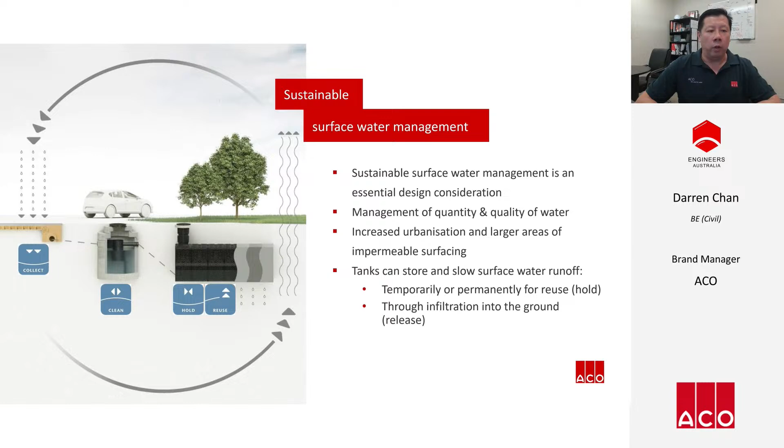Underground tanks are used in lots of projects as councils legislate to protect their downstream waterways and infrastructure. Managing both the quantity and quality of water being discharged off a site is only going to grow in importance, particularly as our cities urbanise and rainfall events intensify as the climate changes. These days, larger areas of the built environment are being covered by impermeable surfaces, which of course increases the risk of flooding. Tank solutions are a conventional way to store and slow down the surface water runoff to pre-development rates as well as replenish the groundwater at a more natural rate.

These are the system elements that are designed to work with the natural water cycle. On a slab or pavement, drains are typically positioned to intercept or collect stormwater runoff, which is then treated or cleaned to prevent clogging or contamination downstream.

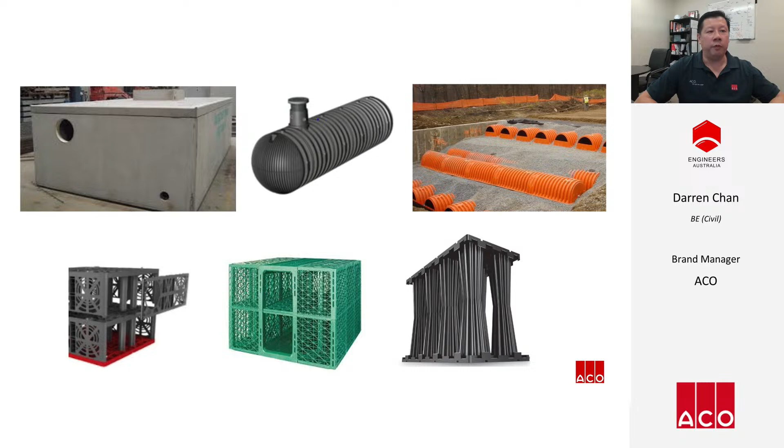As you can see on the image, there are a number of tank solutions available to engineers and urban designers, both natural or engineered structures. Some of the engineered tank solutions include cast-in-place, precast concrete tanks, arches, and plastic structures. We'll focus today on just plastic stormwater tanks, which can be easily integrated in a stormwater management plan for the infiltration, retention, or detention of surface water runoff.

Detention systems, also known as attenuation systems, are designed to spread the peak flow of a storm event. It does this by holding and releasing stormwater slowly. The idea of this is by controlling the runoff to reduce the risk of flooding downstream from a development. A retention system collects and stores water permanently for reuse, for example, to water landscape areas or for firefighting purposes. Infiltration systems or soak wells are used a lot in sandy areas to temporarily store water to allow it to naturally seep back into the ground to replenish a dropping water table.

To illustrate this, retention and infiltration are two common adaptations of these tanks to make the best use of captured stormwater. Retention is for irrigation or reuse purposes. Infiltration is where the soil can naturally free the water from impurities. In both cases, the water is used at or close to the source of collection without it flowing through to any downstream infrastructure or receiving waterways.

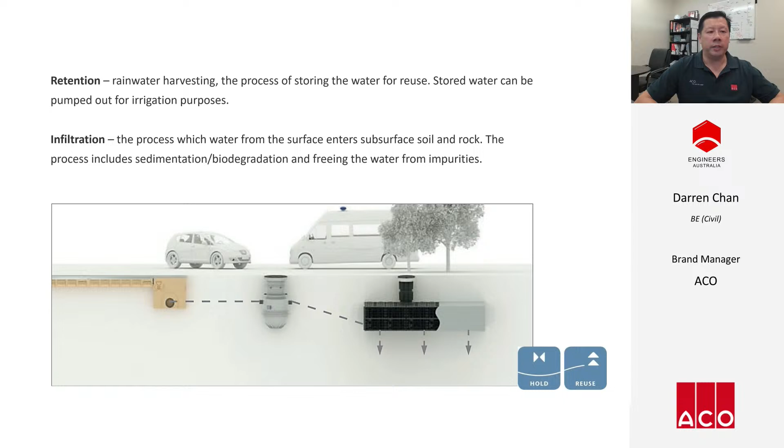But if discharging into downstream infrastructure is the objective, then as I explained before, detention gives designers the greatest control over the quantity of water to enter it. In very simple terms, it's an easy calculation.

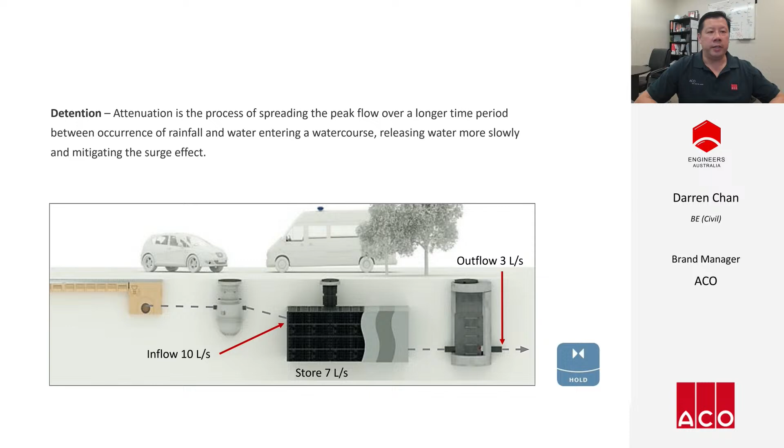Before I go on, I want to make special mention on two types of hydraulic control structures. The first are stormwater treatment devices. These are located upstream of the tank, with their performance being individually assessed and governed by the EPA and local DA requirements. Depending on the project requirements, there are many types, from gross pollutants or silt traps, stormwater filters, permeable pipes, to even light oil separators used where hydrocarbons exist.

The other type of hydraulic structure are flow control devices, which control the release of water to prescribed rates downstream of the tank. These are typically installed in chambers with either purpose-designed mechanisms or a conventional orifice plate. Both these hydraulic control structures are not the topic of today's presentation, but I wanted to mention them as they are essential elements that affect the quality and quantity of water being discharged off the site.

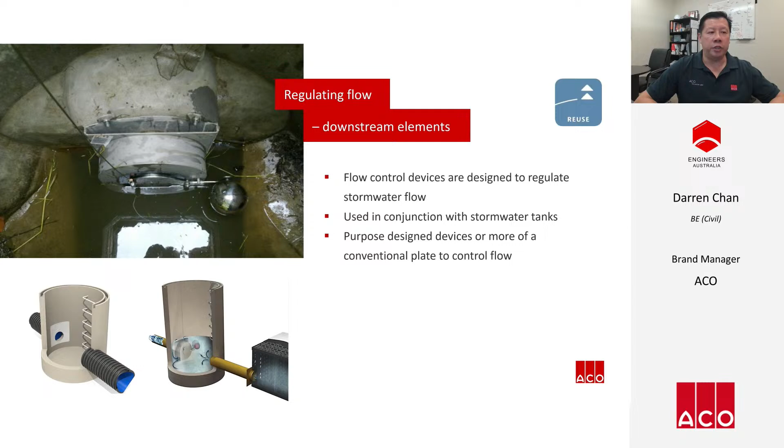So today, I'm only going to focus on plastic tanks that can be assembled into producing underground cells for water storage. These can be adapted in a softscape where infiltration can be achieved. Here you can see them assembled, wrapped, and backfilled.

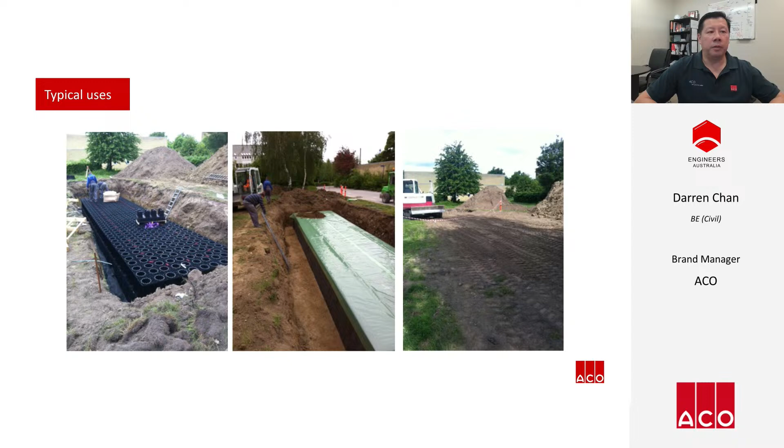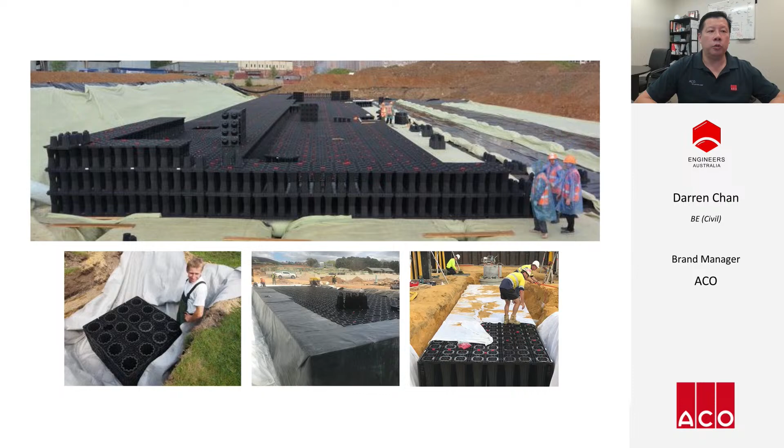They can be installed under slabs in commercial and industrial applications where space is a premium. In fact, geocellular plastic tanks are installed in lots of projects, from car parks, driveways, and landscaped areas to commercial buildings, schools, industrial areas, airports, and military bases.

Here is an example of a recent installation of a tank being used for infiltration at a life-saving club. Stormwater captured from the club's rooftop and its infiltration into nearby vegetation was part of the sustainability design brief. With limited space to work with, designers needed to maximize the storage capacity of an infiltration tank whilst fitting into a very restricted space. An easy-to-maintain sedimentation trap was also required.

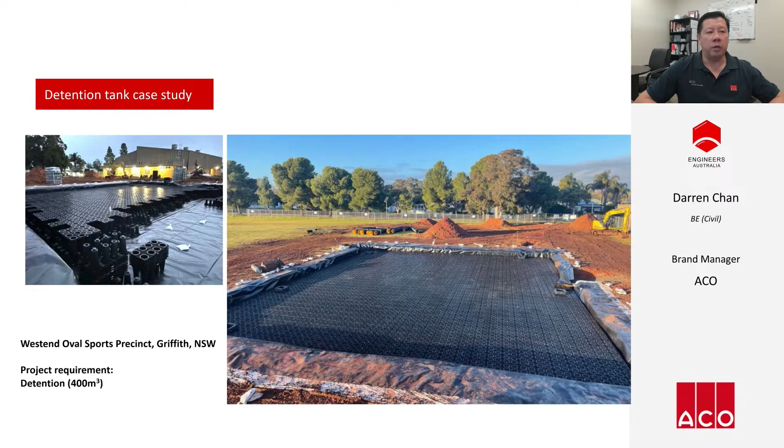This is an example of a tank being used for detention in Griffith, New South Wales. Designers had to deal with runoff from the site. The tank would store and gradually release the stormwater runoff into the council's downstream infrastructure, while also allowing direct access for watering the sports field.

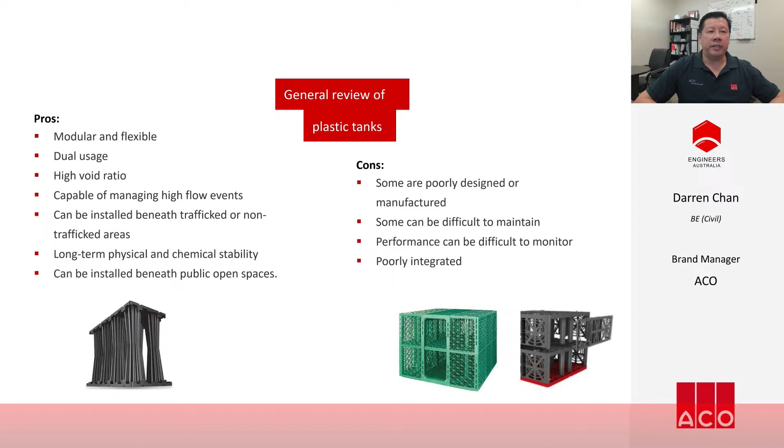In the industry, there is a wide range of plastic tanks. The two on the right are typical of plastic crates. The one on the left is typical of a modern geocellular unit. Unlike concrete tanks, plastic tanks are versatile. They can be cut and joined, and the structure can be used for infiltration. Good designs have a high void ratio and are easily maintained.

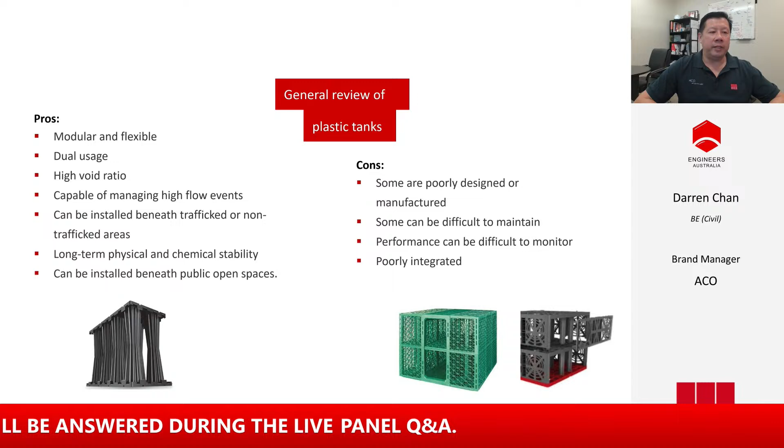Good designs are also load rated and hold their strength over time, but there are poorly designed plastic tanks that are difficult to access, inspect, and maintain. Unfortunately, these give all plastic tanks a bad name. Finally, the designer must ensure these products are integrated and meet the quality and durability requirements of the stormwater management plan.

So when specifying plastic tanks, there's a number of things to consider. Councils, through their development control plans, will enforce compliance to regulations. They will specify the methods and engineering needs to ensure the property meets the stormwater management plan. This takes into account the volume of water that the property needs to manage from landscaped, hardstand, and roofed areas.

Not only does the certifying engineer need to integrate the tanks properly, but as with all key stormwater products, the structures themselves need to meet minimum strength, durability, and quality requirements.

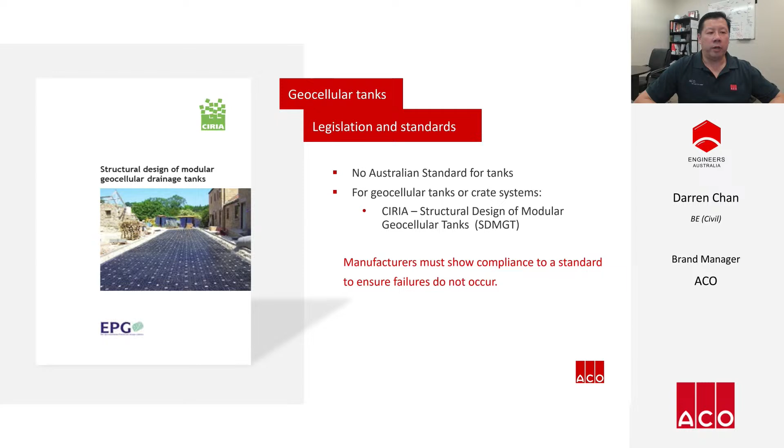In Australia, there are no standards that govern plastic tanks, and the problem with that is that some manufacturers make claims about strength and design life that just aren't substantiated. However, there is a UK standard for plastic tanks called Structural Design of Modular Geocellular Tanks. It gives guidance on testing, structural design, construction, and installation. This is the gold standard to benchmark for performance, and manufacturers should qualify their products to this standard to ensure that failures don't occur.

A structural design should consider the load-bearing capacity of the tank. The stronger the tank, the shallower it can be buried, resulting in reduced construction cost. What determines the depth of cover required are things like the soil type, tank design capacity, groundwater level, pavement thickness, and design loads. The UK standard identifies these as the main factors overlooked that contribute to failures.

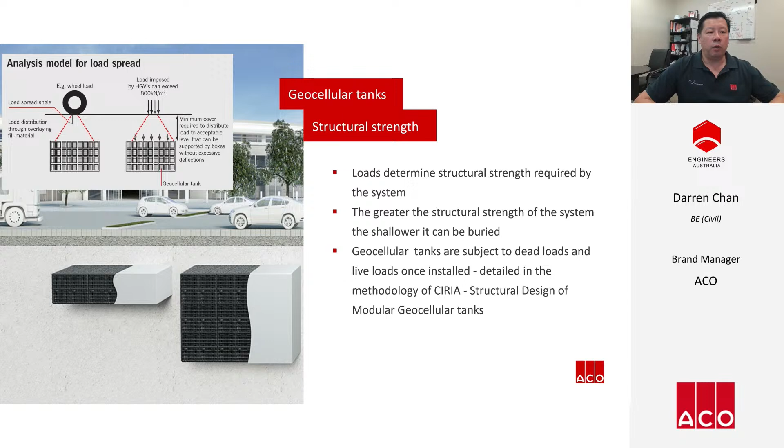And manufacturers must be able to come clean on their strength data and prove it with independent testing. To address all this, the UK standard has detailed all the requirements for laboratory strength testing.

And when considering loads, both short-term and long-term loads must be addressed. Dead loads include the mass of soil surrounding the structure, plus the weight of slabs, or anything else permanent that a tank will be subjected to. Live loads are temporary loads like vehicles, which also need to be considered. Tanks that have vertically aligned load-bearing pillars will offer good vertical strength and stability, and manufacturers should be able to provide you with independently tested vertical load results.

Lateral loading is as important as vertical loading and takes into consideration soil mechanics. This is the key driver to how deep a tank can be installed. Beware that specifically in high water table applications, tanks can be pushed out of the ground. So in these instances, either locate the tank close to the surface to avoid the water table, or beneath heavy pavement to anchor it down.

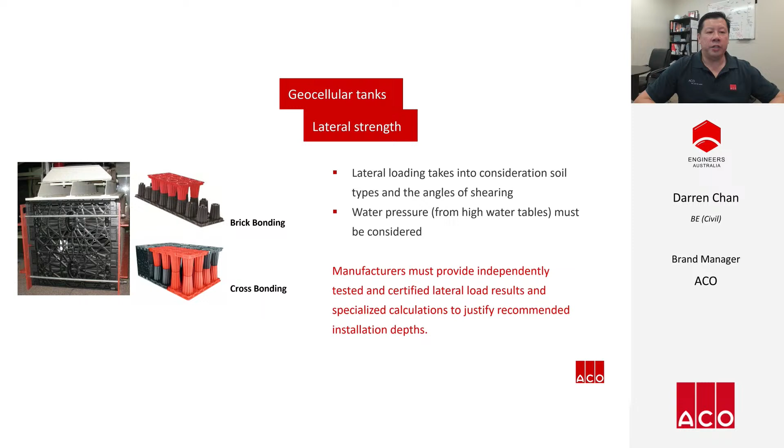Great emphasis should be placed on jointing methods. Systems that use a combination of brick bonding and cross bonding allow for a more rigid tank construction. Again, manufacturers should provide independently tested and certified lateral load data to justify the installation depths they recommend for your project.

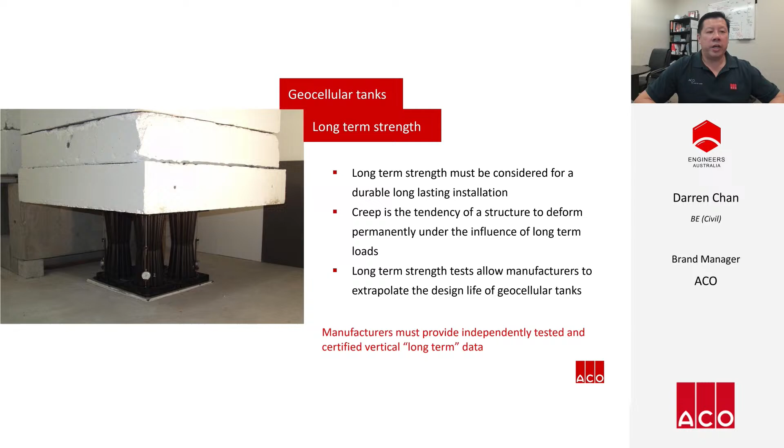Some manufacturers have a tendency to only disclose their short-term and not long-term test results of their tanks. Products need to be able to sustainably support loads over the design life of the project, which is crucial for a durable installation. Tank materials are liable to creep, meaning they deform over time, and products must be strong enough to withstand this. Long-term strength test data allow manufacturers to determine the design life of their tanks. Not appreciating long-term strength can have extreme consequences.

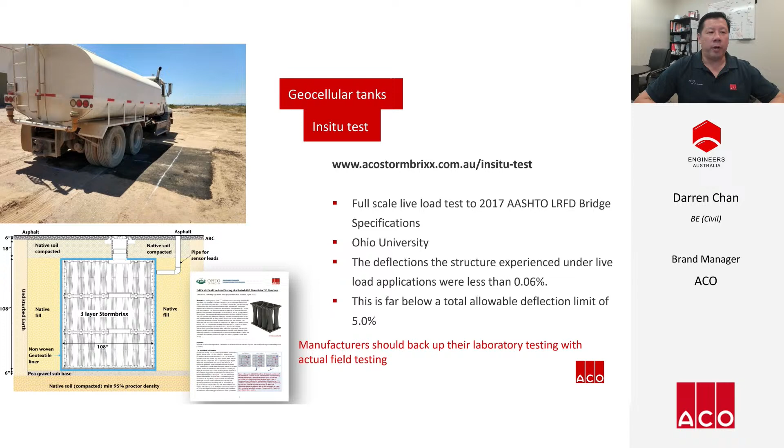Taking a tank out of a controlled environment like a laboratory and measuring behaviour in a typical environment gives all stakeholders a better indication of performance. Whilst the UK standard provides methodology behind laboratory static tests, ACO conducted a full-scale live load test on a buried tank to an American standard. This was documented by Ohio University. Equipped with sensors to measure vertical deflection and lateral movement, the tank was installed as it would be in practice. Here is a short video of the test.

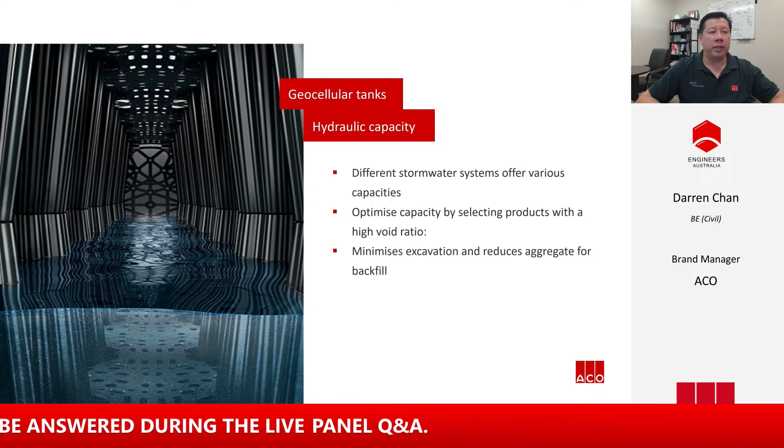For tanks, the hydraulic capacity refers directly to the volume of water that the structure can store, and different tanks in the industry will of course offer different capacities. You can optimize the capacity of the tank by selecting products with high void ratios, which is over 90% for geocellular systems. Having such a high void ratio reduces excavation and construction cost.

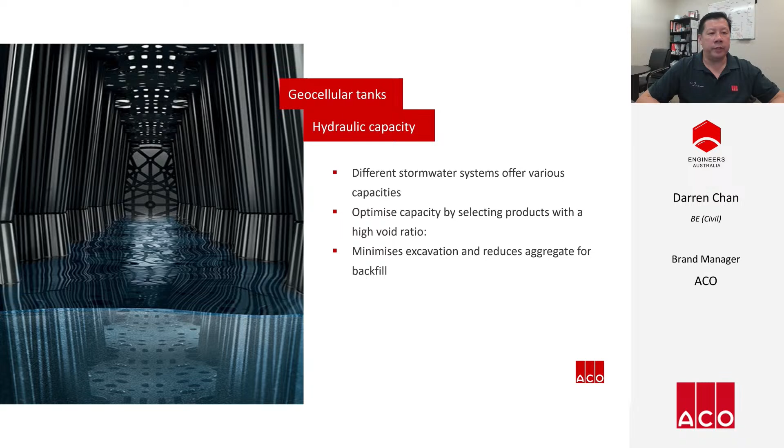Now arch systems, for a quick comparison with geocellular systems, have a void ratio of around 50%, which essentially means the excavation needs to be almost twice the size. Arches hold water in the open space beneath them, as well as in the voids between the stones. This isn't an efficient way to hold water, not to mention the additional cost of the stone fill.

Let's look at concrete structures. Although concrete tanks provide 100% water storage inside the tank, they do have thick walls which reduce the void ratio to around 80%, and they are very expensive to build and install. In comparison, geocellular tanks are more economical whilst still providing a high amount of storage.

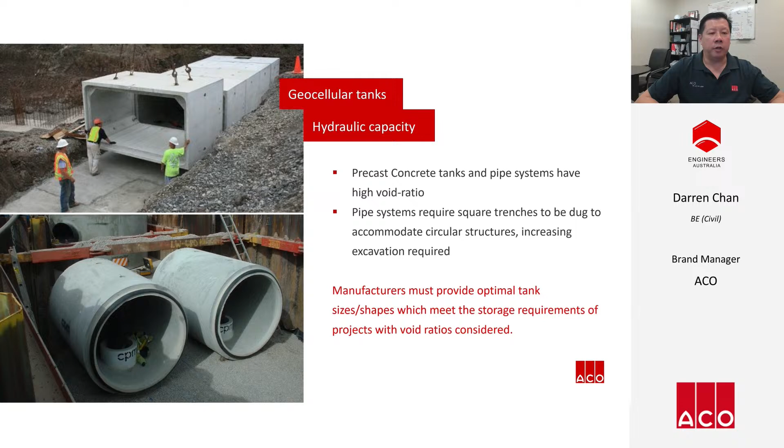For concrete pipes, they are obviously round but need a square trench. Each pipe needs about 250 millimeters of sand or stone bedding and around half a meter spacing between each run. All of this increases the excavation and fill required, making the installation bigger and more expensive. A good manufacturer should be able to help you optimize the space to meet the site's storage volume requirements.

A tank versatile enough to shape itself around your project will give you more options to meet a site's storage requirements. Modular tanks offer the ability to adapt themselves to an underground space with some level of flexibility. This is particularly useful when avoiding things like existing services, buildings, or footings. Manufacturers should give you tank layouts to help you navigate the physical constraints of your project, as well as clear installation instructions.

As I mentioned earlier, tanks can perform any or a combination of these roles, and depending on how a tank is used, it requires a different type of wrapping.

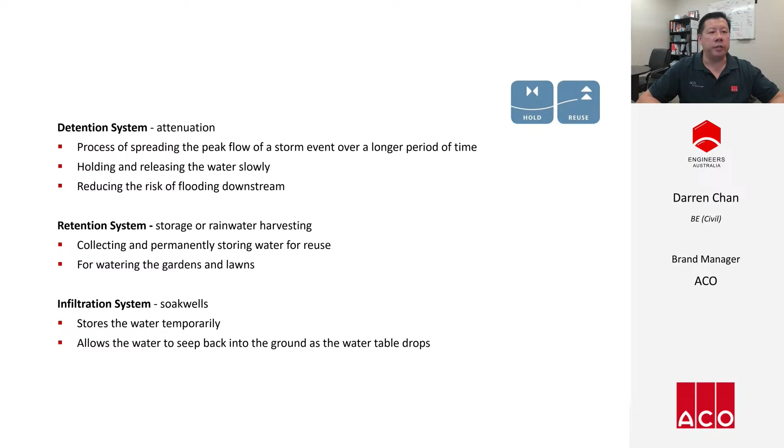In non-sensitive retention or detention applications, geomembranes are used as the bladder for storing water, along with a geotextile on the outside to protect it. As long as minor leakages from the tank can be tolerated, the membrane is normally just taped together. This is used in the vast majority of applications.

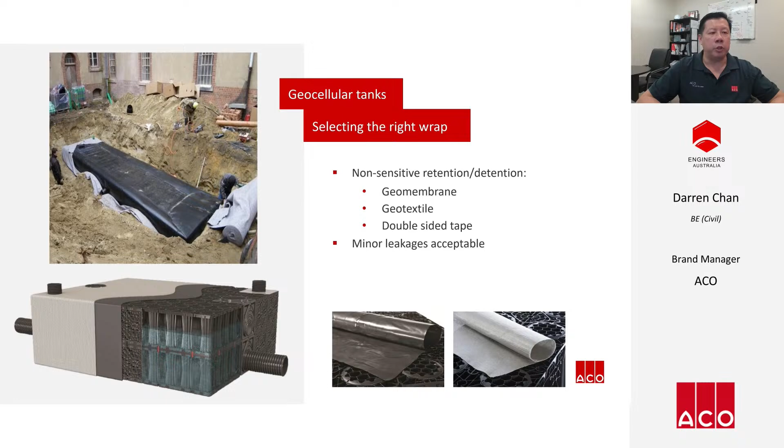But for sensitive applications, like a tank positioned close to a building or containing contaminated runoff, we'd recommend using a welded geomembrane installed by an accredited contractor. This ensures watertightness, but as before, the geotextile wrapping on the outside needs only tape to secure it. The focus is on the integrity of the membrane.

And for infiltration systems, there's no impermeable geomembrane used, just a geotextile which acts to minimize sediment buildup within the tank while allowing for the water to percolate.

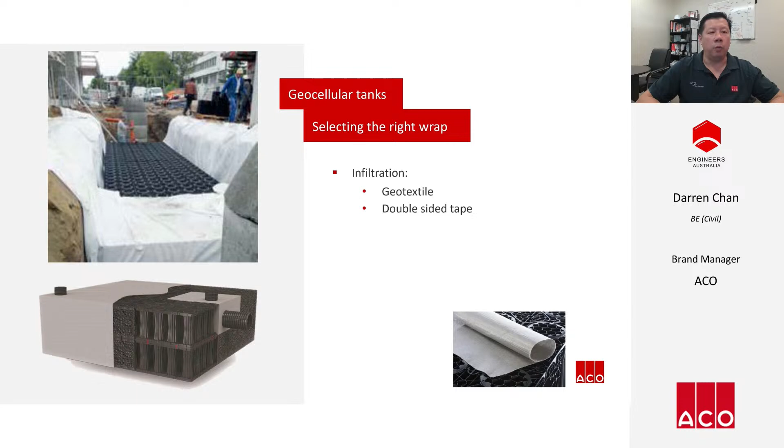Stormwater tanks can be very large, and moving them to site and then into the excavation can be costly. Geocellular plastic tanks are lightweight to transport, and the modules are designed to stack inside one another, which means they take up significantly less space than other products. This leads to fewer trucks to site and fewer trips to the excavation. Not only is this more cost effective, but better for the environment.

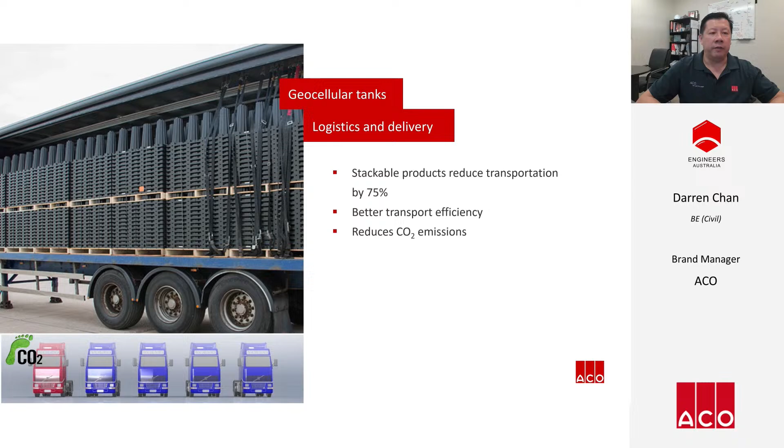The site itself should be considered when selecting a product. The time it takes to store and assemble these tanks can significantly affect construction costs. Some tanks need storage, and worse still, some tanks simply don't stack. Some plastic crate systems are generally assembled away from the excavation, then lowered in. There are additional rent and labour costs associated with building and storing the tanks before installation.

Geocellular stackable tanks, however, are really beneficial for sites with restricted space or labour, in that they can be built inside the excavation.

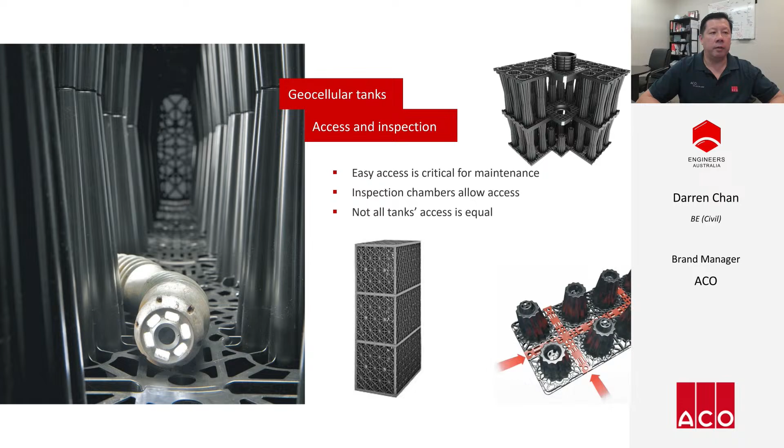Here is a short video of an inspection carried out in a modern geocellular tank design. A geocellular tank is located under a pedestrian precinct. A maintenance team has lowered a camera down a shaft through the inspection opening. You can see the camera move through the system easily without being restricted by any physical barriers in the tank.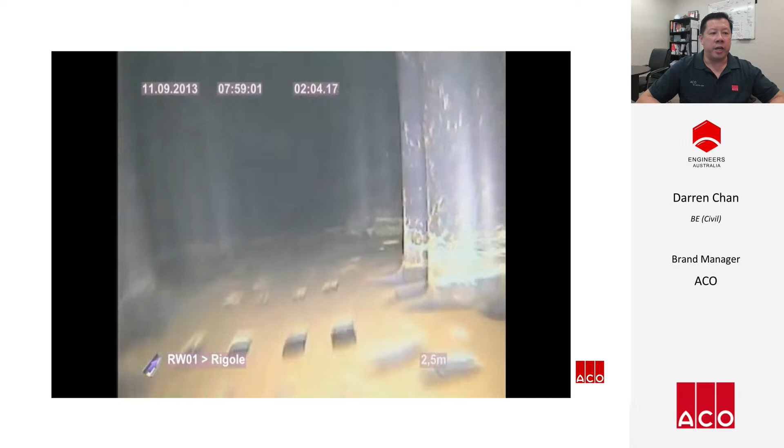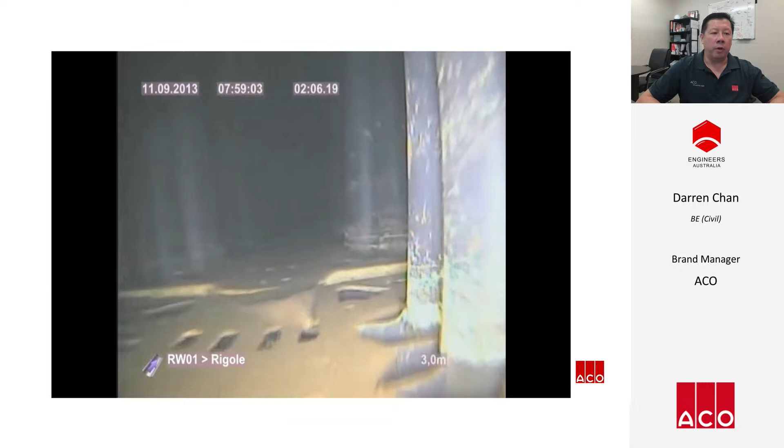At the bottom right, you'll notice a chainage counter showing the distance travelled by the camera cable from the manhole. If I showed you the full video, the camera ends up 30 metres into the tank. This would not be at all possible in tanks constructed of plastic crates.

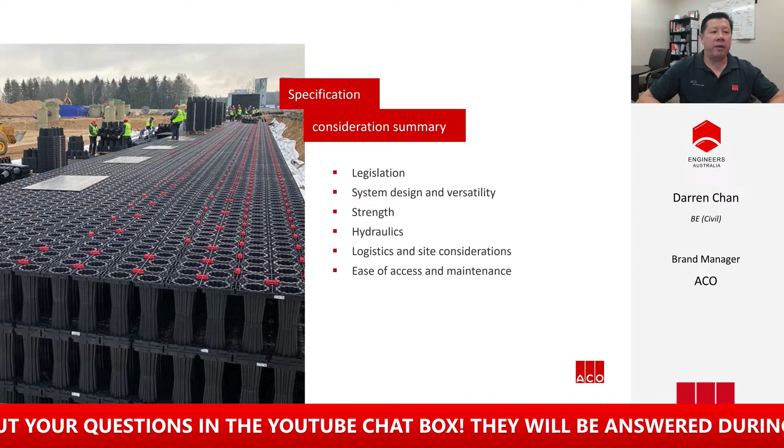And so we've now come to the end of our presentation. To summarise, these are the key things to consider when specifying tanks: compliance and legislation, the tank's design and strength, the void ratios for storage, how easy it is to transport, and the ease of access for inspection and maintenance. This now ends the formal part of our presentation.

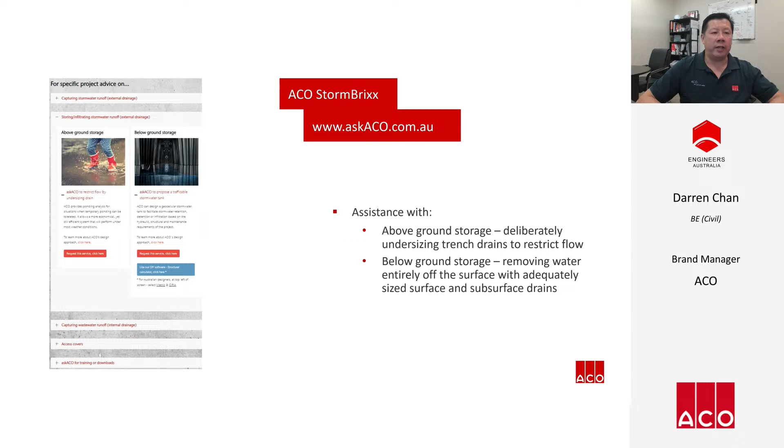Part of our suite of services is that we can help you with storage above ground or below ground. Where the consequences of ponding water on the surface are low, we can provide a ponding analysis when temporary ponding can be tolerated. We do this by deliberately undersizing trench drains to restrict flow. Alternatively, we can help you remove water entirely off the surface with adequately sized surface and subsurface drains.

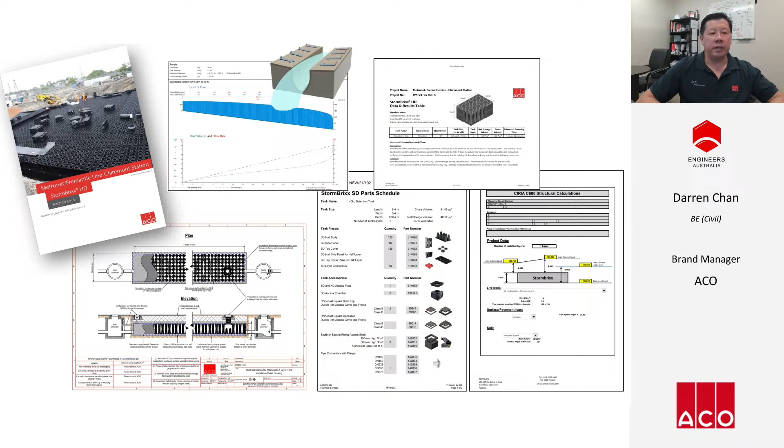We have a technical team of engineers ready to assist you. For your specific projects, this involves configuring both trench drains and tanks and providing a part schedule for that configuration. We can also provide structural tank calculations based on the UK standard structural design of modular geocellular tanks, and a fully documented proposal specific to your project. This service is offered free of charge and without obligation.

To help you specify the correct size tank, we've designed a simple online StormBrixx configurator program. All you need to do is provide some basic information such as your desired tank size or storage volume, cover depth over the tank, and type and location of inlets and outlets, and the configurator does the rest. The results can be downloaded, providing a summary of the inputs and a bill of materials for the configured StormBrixx tank, which can be emailed to ACO's sales team for a price and availability.

To make the structural validation process easier, we've also designed a simple online structural calculator. It's very simple to use, and the required inputs include cover depths, height of water table, live loads, pavement type, and soil type. The results can be downloaded as a 2-page summary or a 6-page comprehensive report. The StormBrixx Configurator and Structural Calculator are both available on ACO's website for you to use any time of the day.

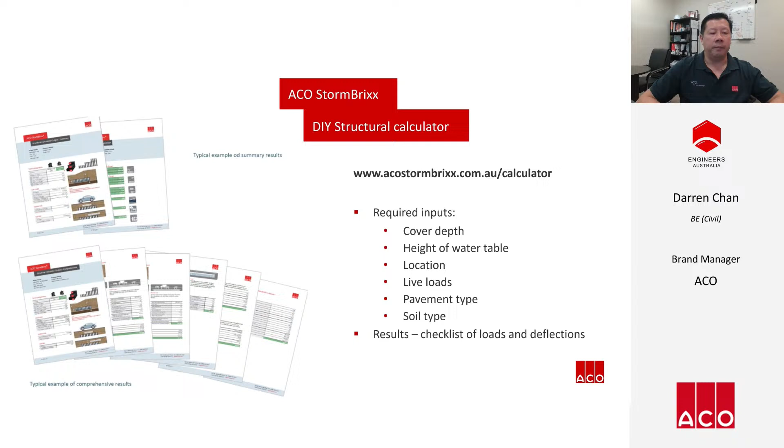If you would like to talk to us directly, we have technical representatives across the country who would be only too happy to assist you with your next project.

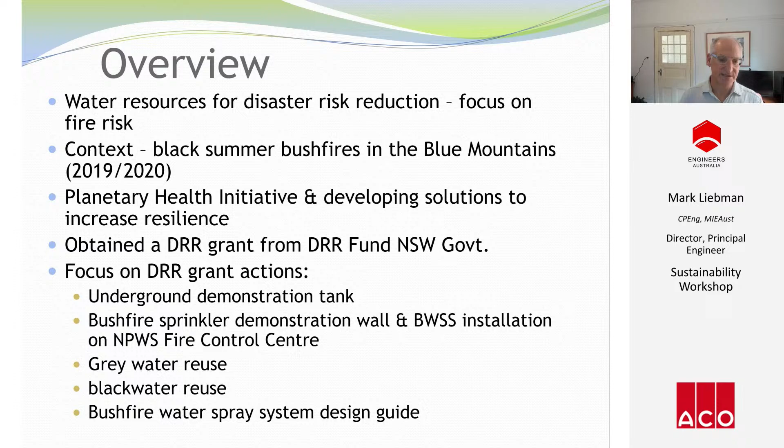So we just have to put the risk in context here, and risk communication is really critical in this space. None of the risk management measures we're looking at today are intended to make people feel safe enough to stay instead of evacuating at the appropriate time. In fact, all of these measures are the risk management actions that are the highest hanging fruit - not the easiest things, they're the hardest things to do. People need to be encouraged to undertake the low hanging fruit first, things like managing an asset protection zone, sealing a building, replacing flammable materials with non-flammable, and so on.

The evidence base for a lot of what we're going to present today is not very strong, and it's a pretty immature space, but it is growing rapidly. One key area I've found really immature is remote operation of bushfire water spray systems, and we really need our electronics engineering brothers and sisters to come and innovate in this space.

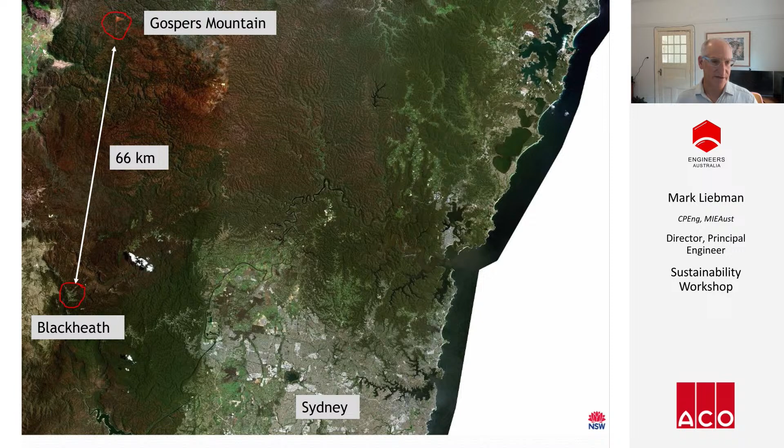By the middle of December, this fire had actually burnt 66 kilometres and had reached Blackheath. On this day, we had some pretty crazy wind, and a backburn had gone wrong, inadvertently jumping into the Grose Valley and starting its own fire, which then started to head towards Blackheath. This was the day I evacuated my family.

Blackheath was eerie. Everyone was staying indoors or evacuating.

The Indian Ocean Dipole started to turn at Christmas, and by New Year's Eve we had a sprinkle of rain and it started to get cold. On a perigee or supermoon weekend on the 10th of February, the drought broke with over 400 mil of rain falling in one weekend - a long duration, 24-hour, 1-in-100-year event. Another weekend in March 2021, we had over 500 mil of rain falling. Suddenly, we went from managing fire risk to managing landslide risk and COVID risk, but that's another presentation for another day.

When the ash had started to settle and the vegetation had started to grow back, I started to think about solutions and resilience and what we could do to increase our resilience. Resilience refers to the ability to successfully adapt to stresses, maintaining psychological well-being in the face of adversity. It's the ability to bounce back from difficult experiences.

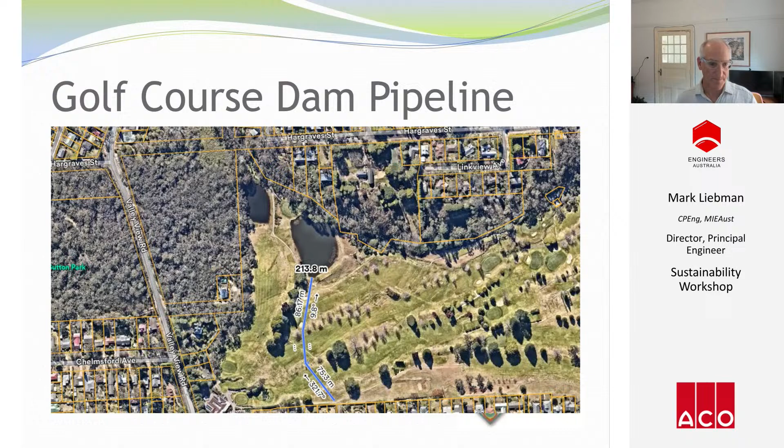I started to talk with a colleague, Liz Bastian, who had been employed by Blue Mountains City Council to develop the Planetary Health Initiative. We submitted a joint grant application for disaster risk reduction, and we were successful in getting that funding.

Our grant application was to support the Planetary Health Initiative, which is really a learning organisation - a capacity building organisation - and its intent is to create systemic change. We wanted to increase not just the capacity of local designers and builders, but also local residents, local RFS, anybody that we could influence really.

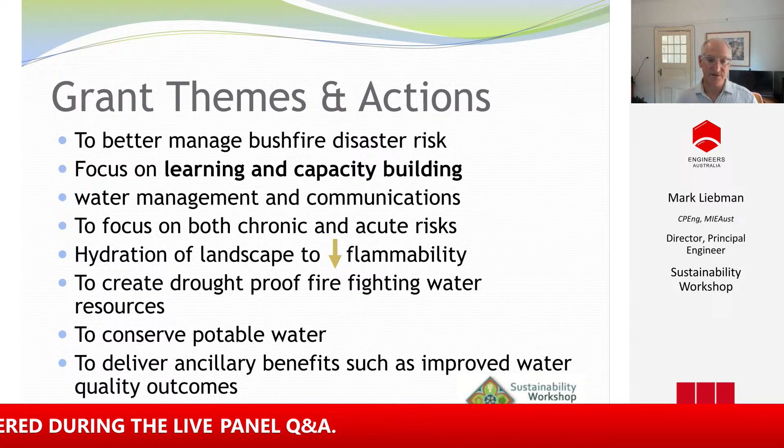The grant was an interesting mix of technical and communications. Half the grant was spent building disaster risk reduction measures, while the other half was about communications - learning lessons from what people did and sharing those stories.

We focused on both chronic risk, which is everyday risk, for example drought, and also acute risk - fire risk is an acute risk. We came to understand that by providing water resources to hydrate the landscape, we could potentially combat both types of risk. It's obvious that dry landscapes are more flammable, and there is scientific evidence for this.

In the upper mountains, we have a lot of ridgetop development with very shallow sandy soils and weathered bedrock at about 1 to 1.5 meters below ground. We have a lot of dead-end streets, and water supply in these dead-end streets can be an issue during a bushfire emergency when water pressure can be very low.

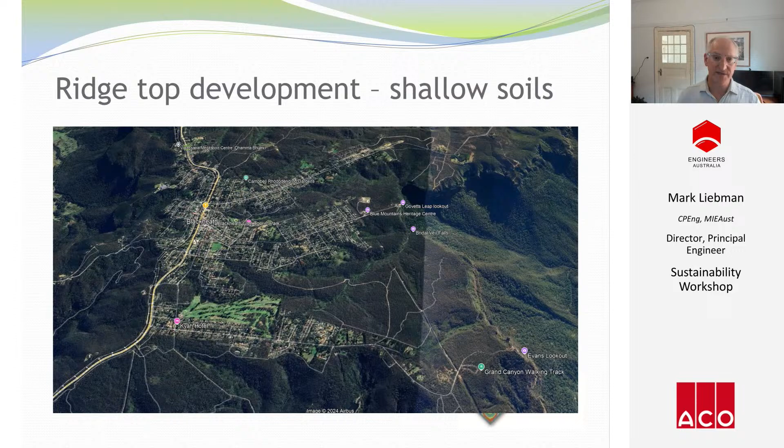Our solution to this is to propose buried storage tanks at key locations to make large volumes of water available to RFS and Fire and Rescue New South Wales.

We constructed a demonstration proof of concept underground tank at the Planetary Health Initiative. The idea behind the tank is to provide a static water supply in key locations where water resources are limited, avoiding the need for fire tankers and their crew to leave a fire to refill with water.

I've had a recent conversation with a friend of mine who works with fire and rescue, and approximately half of the firefighting resources that are available at the time are not being used because they're travelling back to refill.

Our demonstration tank is 150 kilolitres, with size mainly driven by budget and space. The tank is connected to a bushfire water spray system on the Planetary Health Centre building, which also houses the National Parks and Wildlife Service Fire Control Centre. This is a pretty important building to protect.

The source of water for the tank is the car park of the Planetary Health Precinct. We've placed 200 micron litter baskets filtering the flow. Essentially, this is a small stormwater harvesting project.

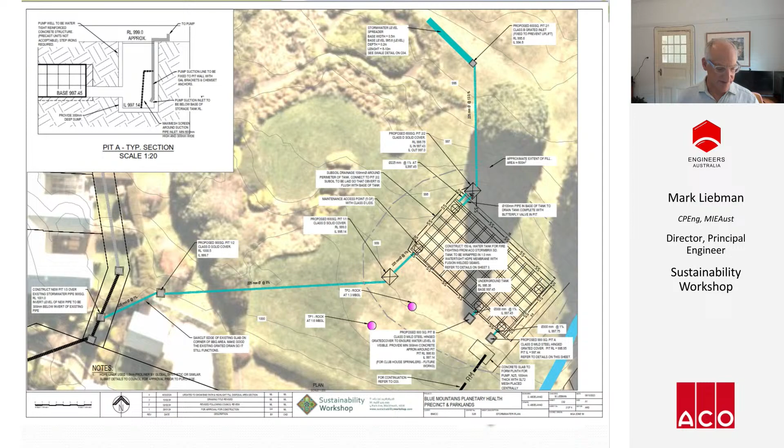We also designed a rising main to lift water up to the road so that 2 fire tankers at a time could come and fill up in about 3 to 4 minutes and then move on.

The tank was built over winter, which was ironically very cold and very wet and quite tough for the team that were building it. The tank is constructed from ACO StormBrixx, and the tank is only 900 mils deep. It had to be shallow to reflect the ridgetop context, where bedrock is about 1 to 1.5 meters below the ground.

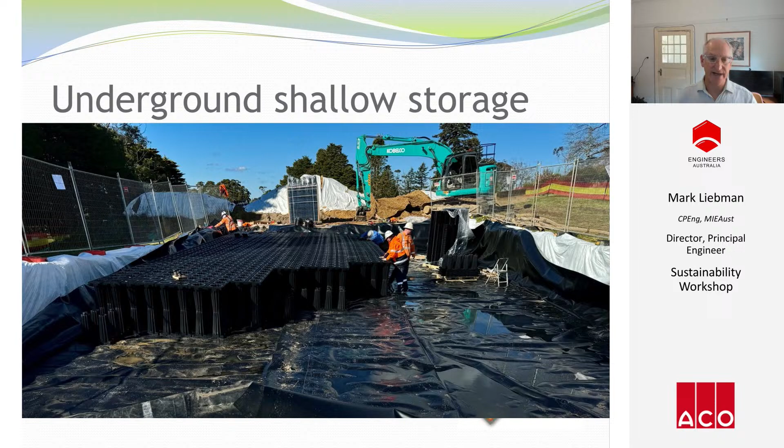The tank was assembled in a few days. After excavation, it has a welded high-density polyethylene membrane wrapped in a geofabric to protect that membrane. It has drainage on the outside to combat buoyancy. This is the tank wrapped up, ready for its final welding.

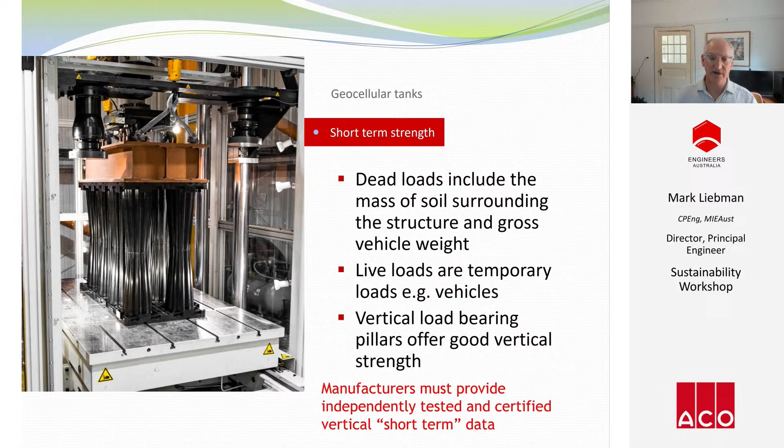I've been specifying ACO products for many years for infiltration. I understood their structural characteristics from the time I'd spent in the UK, where geocellular products are used on most projects to help reduce flood risk. In the UK, through a group called the Construction Industry Research and Information Association, specifications for geocellular structures are well advanced. Failure modes from short-term as well as long-term repetitive loads, otherwise known as creep, are recognised.

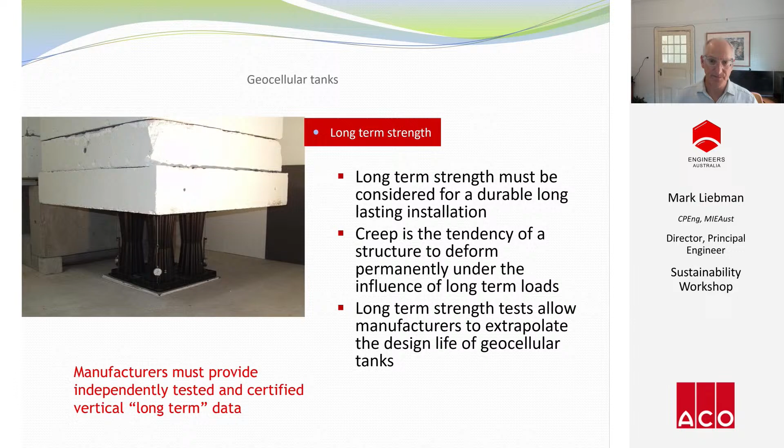Even though what we built at the Planetary Health Centre is not subject to repeated loading, we needed to make sure our proof of concept tank could withstand a typical repeated roadside loading. A creep failure of a tank under a road is not an affordable option for a local government.

We also included a demonstration of an external window sprinkler spray system as a way to manage a key fire risk to this building.

7 windows were to be protected with flat fan spray nozzles, each spraying around 30 litres per minute at 1.75 bar. Our design criteria came from AS 5414, which is a standard for bushfire water spray systems, and this required us to deliver 10 litres per square metre of window per minute, which is quite a substantial flow rate.

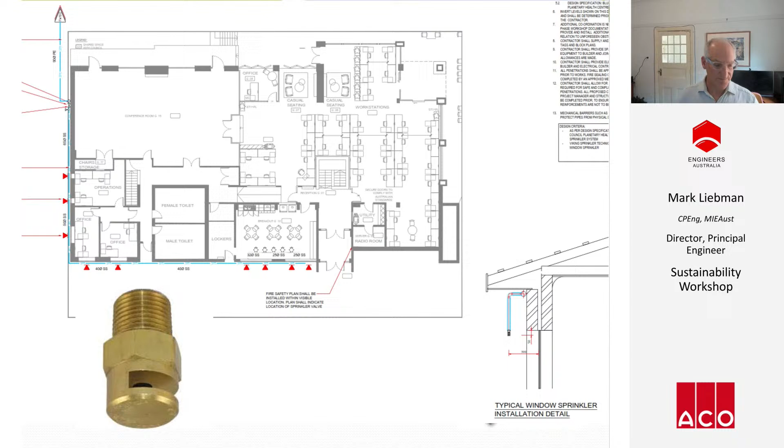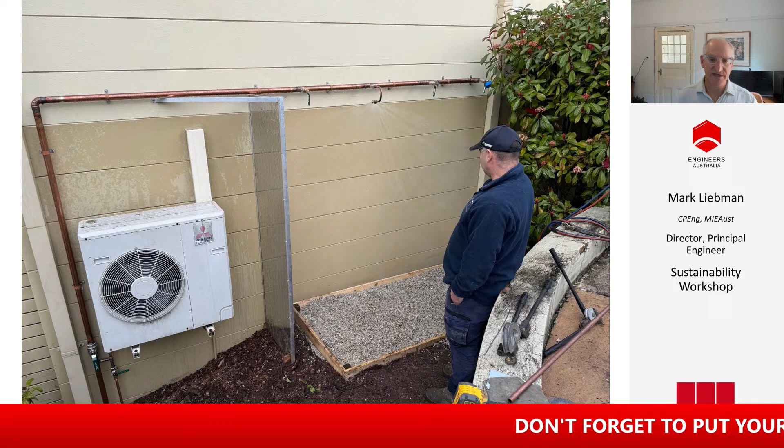We also built a demonstration sprinkler wall, which includes a range of sprinkler types, showcasing what's more effective and less effective. We'd become aware that a number of amateur bushfire water spray systems had been constructed, and that people were using fine aerosol nozzles, which we think would be quite ineffective during a bushfire.

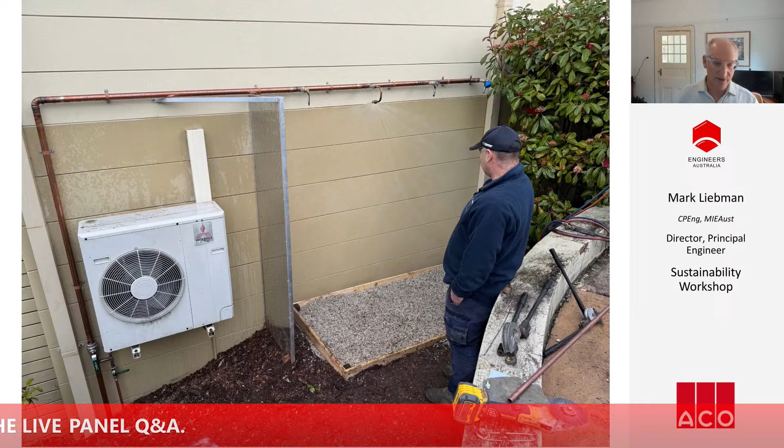They can be useful for hydrating the landscape, but I would not like to rely on them to effectively cool a building or reduce fire risk.

The Planetary Health Centre organised a bulk buy discount for supply of rainwater tanks, which has been very well received and used by the local community.

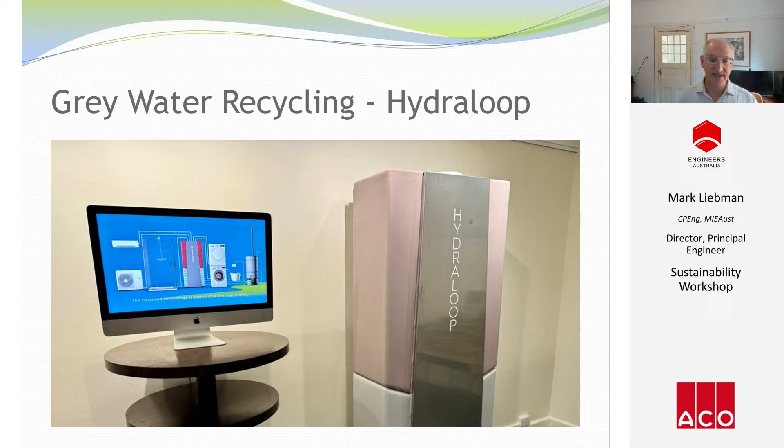We partnered with Sydney Water and have a demonstration Hydraloop, which is a household scale grey water recycling system. This is important because it creates a way for household scale drought proofing and a way of hydrating the landscape to reduce drought and therefore to reduce fire risk.

We've also been looking at opportunities for black water recycling. We think this is probably a huge opportunity because it's the only highly reliable source of water. If treated, it could be used to fill reservoirs and dams at key locations to make water available for aerial firefighting appliances.

The optics of black water reuse are not great. There will be a lot of resistance, and in itself it is an extreme risk. In terms of risk, it should also be considered as a way of transferring risk. We're transforming fire risk into health and environmental risk, and we need to manage all of those risks. It's probably a lot easier to manage the health and environmental risks than it is to manage the fire risks.

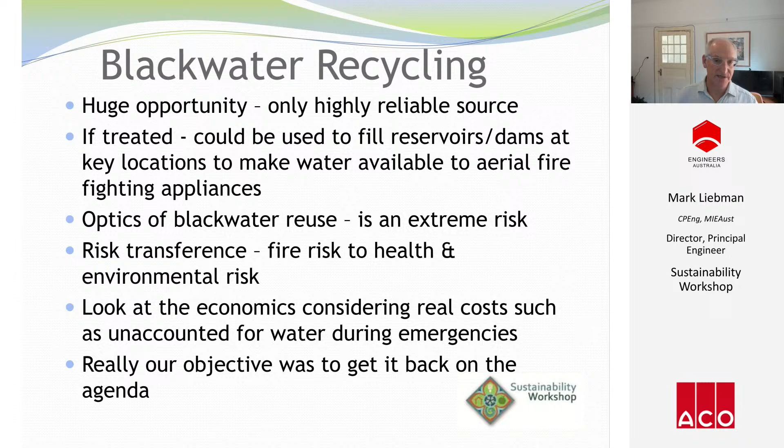We needed to look at the economics, considering real costs such as unaccounted for water during emergencies, which we know to be absolutely significant. Really, our objective with this was simply to get the idea of black water recycling back on the agenda because we know it's going to be required.

Elsewhere, we would be able to use that water to irrigate and hydrate the landscape and reduce the risk of fire approaching the Planetary Health Centre.

One of the key things that we did was develop water spray guidelines for bushfire water spray systems. Again, we worked with the University of Wollongong, and the guidelines build on AS 5414, which I understand is currently being revised. AS 5414 is the relevant standard for bushfire water spray systems. Our intention was to provide a readily accessible guideline based on the best scientific knowledge that we could access.

We've taken a lot of care with the way that we communicate the risk. We would definitely not want anyone staying behind to turn on a bushfire water spray system and then be unable to leave. We know of this exact scenario happening where somebody stayed and it was too late for them to leave, and they got covered in foam when an aerial firefighting appliance had done an aerial drop on their property.

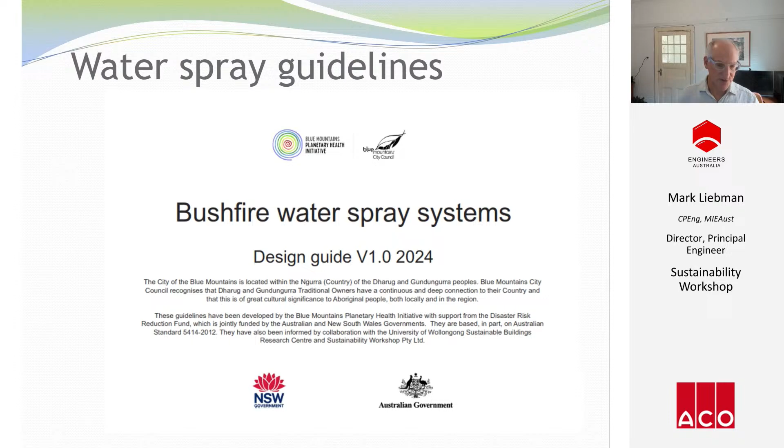The guidelines include the results of computational fluid dynamic modelling from the University of Wollongong, which demonstrates the effectiveness of different types of sprinklers under different mounting locations and how they can be affected by strong, windy bushfire conditions. This work is intended to help designers understand how ineffective some systems can be, and how important it is to have a diverse approach to spray systems and to understand local conditions - to really understand where the key bushfire risks are coming from and where it's likely that you're going to get prevailing winds during those emergencies.

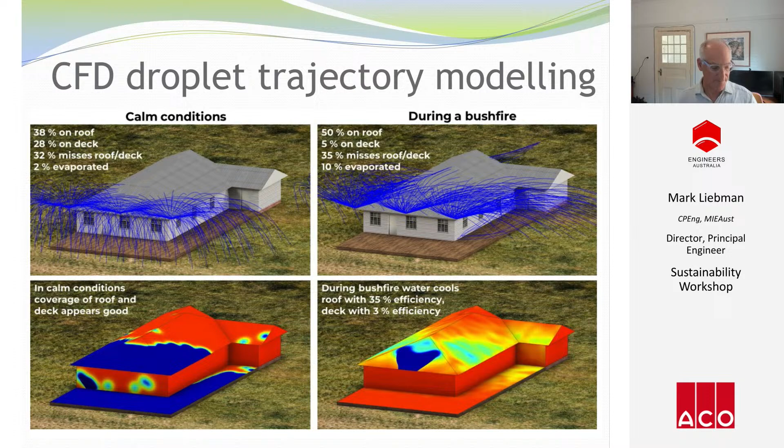So to try and wrap things up, some of the key learnings include that there's no one-size-fits-all solution. We need a really big tool bag of solutions here. We need to keep our landscape hydrated. We need emergency systems in place.

I've also observed that we have a tendency to avoid complexity and to avoid integrating our water resources. However, if we are going to have any chance of really building resilience, we need to embrace complexity and we need to integrate all of our resources.

We also need to have a really frank appraisal of risk. And by that, I'm specifically referring to appraising human health and environmental risk in the context of fire risk, and specifically with reference to blackwater reuse.

I wanted to acknowledge the amazing work done by Blue Mountains City Council in leading in this space, and the Planetary Health Precinct and their recognition of the need for disaster risk reduction. Thanks also again to the New South Wales Government for their disaster risk reduction funding. Thank you.

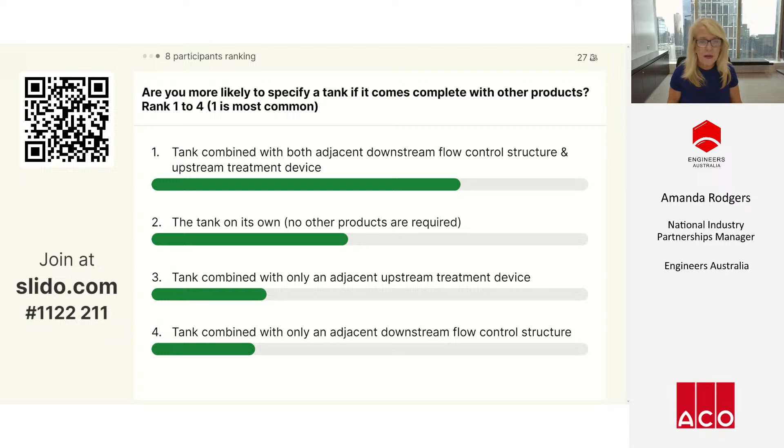Okay, I think we've got most of our results in. Darren, your thoughts?

Thanks everyone for participating in the poll. We asked that question to help us understand, as designers, what you require. We supply some of the products, but we will look at R&D and developing other products that complement our current products. Looking at those results, it seems most will require both upstream and downstream, which is good feedback for us to look at our product range and what we can improve and offer to new designers in the future with different products.

Thanks, Darren. Next polling question: what are your key concerns when specifying tanks? Rank 1 to 4, 1 being the most common. 1, is there room to fit the tank without interfering with footings, services, etc.? 2, is the tank strong enough? 3, is the tank able to be maintained? And 4, is the tank economical to install? Thank you.

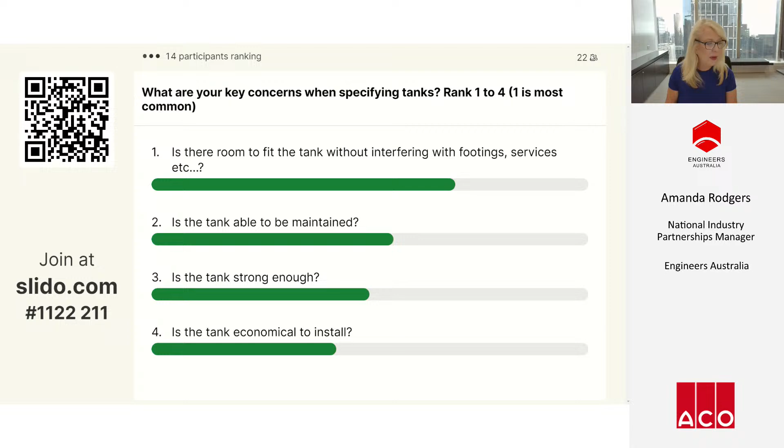So I think we've landed on our final overall result. Darren?

Interesting seeing those results. I can see that interference with slabs and footings was up there. From looking at all these past projects we've done, limited space is most of the issue — trying to fit a tank within the property where there's not much room. That's a great concern, especially in built-up environments. Also saw number 2 coming in as maintenance. Obviously, you need to be able to maintain your tank, otherwise it shortens its lifespan, and to keep it functional it has to be maintained. So definitely we will look at offering ways to clean the tank and improve our products to meet your requirements.

Thanks, Darren. And to our third and final question — thank you everyone for getting involved — what support do you value the most from a tank manufacturer? Rank 1 to 5, 1 being the most common. Number 1, project-specific support to size and configure a tank. 2, project-specific structural calculations to verify a tank's strength. 3, personalised support from a technical representative for 2D and 3D drawings and product data sheets. And 5, BIM models. Thank you.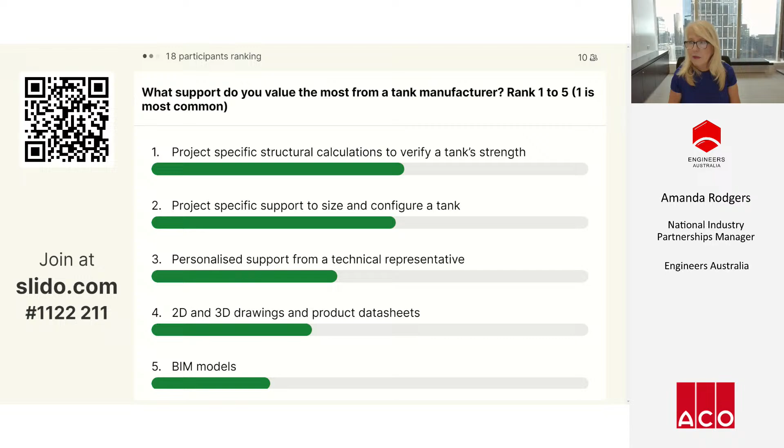Looking at those results, we're always looking to improve our technical support services in any way we can. So we'll review all those answers and come up with ways to improve how we communicate information to you, helping and assisting you in your next project.